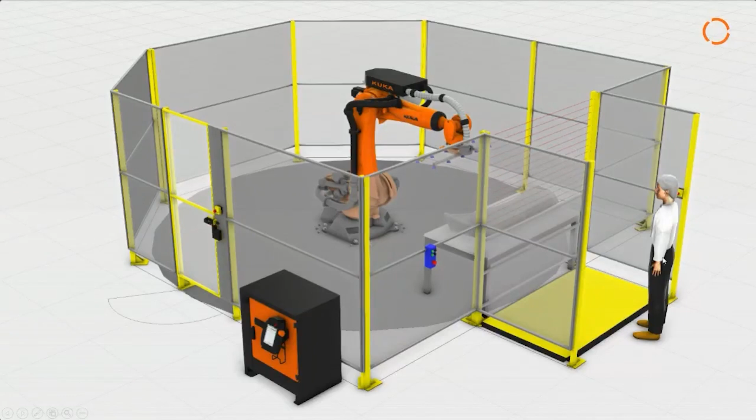Now, if we instead apply our simplest solution here, which is called safe single brake, that is actually a solution which I've tried to depict in this small picture here, where we have the robot mounted inside a closed cell. But instead we have a turntable here where the operator loads and unloads his goods. And what safe single brake does is actually to have a safe stop of this driven axis.

Okay, Laurie can't see everything I'm showing. Wonder if we have a bad bandwidth today. It says my signal is quite good, but hopefully I'll try to take it slow here and come back with questions, so we'll try to see it.

That means that at an emergency stop, it's the external axis that is stopped, not the robot itself. Now we can control several external axes on this part here. And it's also controllable through either a hardware interface, a wired interface, or a safety PLC interface. And likewise, we could also indicate the status of this functionality back to a safety PLC, for example.

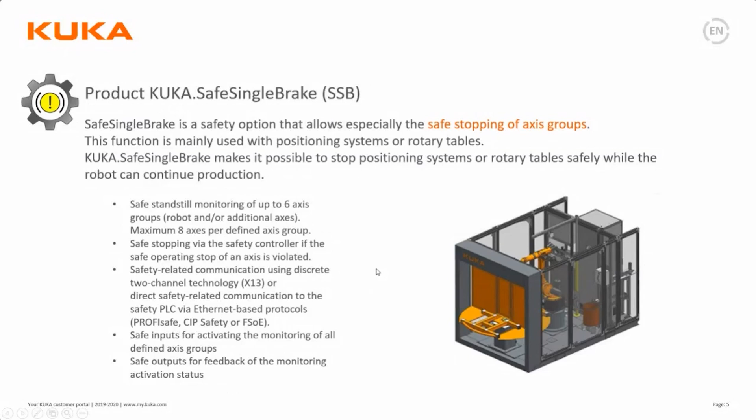The next level of safety solution we have here is what we have named safe range monitoring. And safe range monitoring is, to describe it, a software axis limitation. That means, for example, for the robot's 6 axes, we can limit how much they're able to move axis by axis. So you could say it's virtual physical axis pins to block how much each axis is able to rotate. That means that we are controlling the axes one by one and not really the tool center point of the robot in this solution.

However, this solution also comes with the functionality which is called braking before restricted areas, and I'll come back to what that is a little bit later on in this presentation. But as with safe single brake, this can be controlled by a safety PLC or hardware interface, and will also signal its status back to a safety PLC, for example.

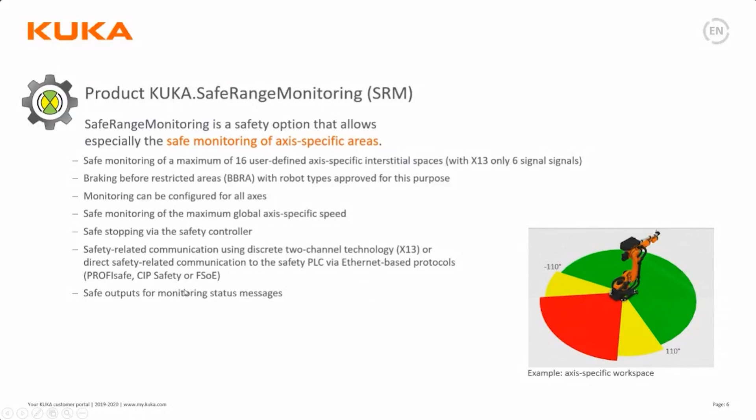The third and most complete product from our side is safe operation. And with safe operation, we can, for one thing, define a virtual robot cell which is significantly smaller than the reach of the robot, and the robot will not move outside of this box or limitation, thereby minimizing the footprint for a robot installation without actually hitting the fence, for example.

The second part of this is that we can define up to 16 user-defined monitoring areas within this space, which can be turned on and off depending on external signals, which stops the robot from entering these areas. And we also have this functionality of braking before range limits. And in this solution, we can also define the size of the tool and the workpiece by defining a number of spheres that cover the tool itself. So it's not only the robot, but also the tool and the load, which is hindered from getting into these areas.

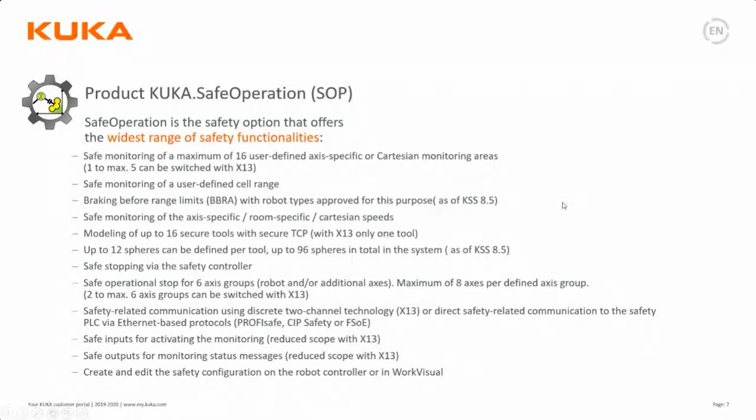So here we can see the difference: if we have put the robot into a cell and we are only using the axis monitoring, the safe range monitoring, then we only control axis by axis, and we have to stop the axis from hitting the fence in this way. But with safe operation, we can move this fence in closer to the robot, still without risking that the robot hits the fence, thereby freeing up valuable space in our production area.

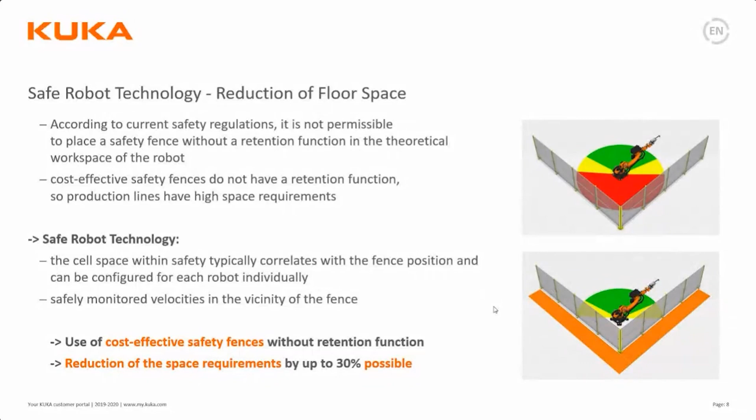And this is also what we've described in this little picture here. We actually defined a pretty tight, small working space allowed for the robot. In this little example picture, it's a very compressed working area allowed for this robot. But we could also define monitoring areas or boxes within this space, which the robot is then not allowed to go into.

And this could be used for different use cases. It could be the simple fact that there's a piece of machinery standing inside the cell which I don't want the robot to hit under any circumstances. It also could be an area or a volume which is turned on and off, for example, through a light curtain. And that in turn is an area where an operator loads or unloads some equipment.

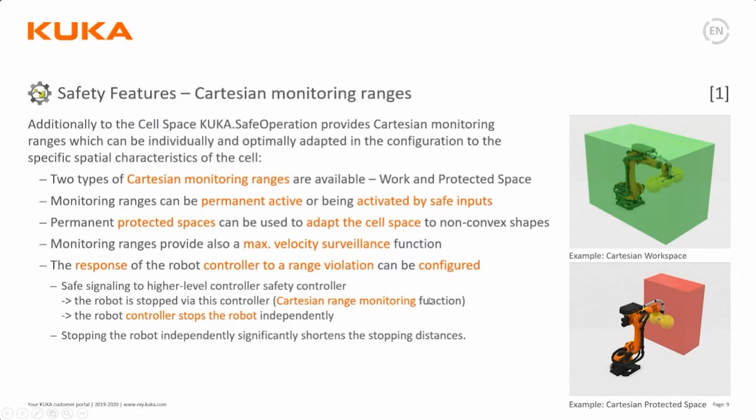And as I said, we could define up to 16 of these areas per robot, and they can be turned or tilted in any direction as we like, and they could even be coupled to the robot base position if we have a 7th axis to the robot, so that these boxes would then move together with the robot as it moves along its 7th axis.

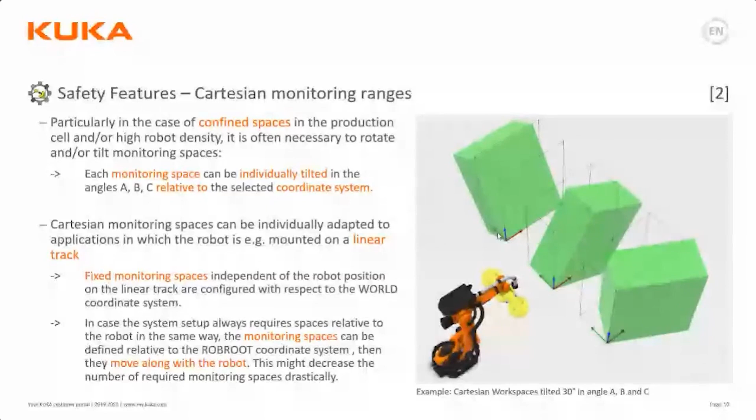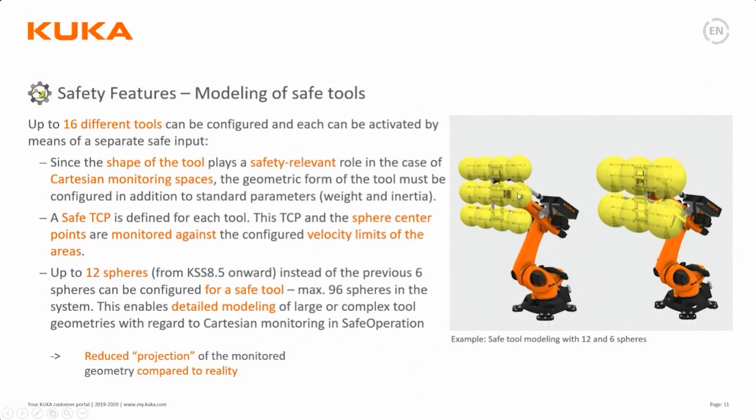In safe operation, we could also define spheres on our tool. I mentioned this earlier. That means basically that for each tool I have, I can define up to 12 of these spheres, which are meant to cover the volume taken up by the tool and the load. And these spheres are then taken into the calculation of the movement of the robot, so not even the load or the tool enters these restricted areas.

And this picture basically just shows that one of the differences with our KSS 8.5 and onward is that we can now define 12 of these spheres per tool, compared to 6 spheres in the old versions, which gives us a higher resolution, so to speak, for the tool and the workpiece.

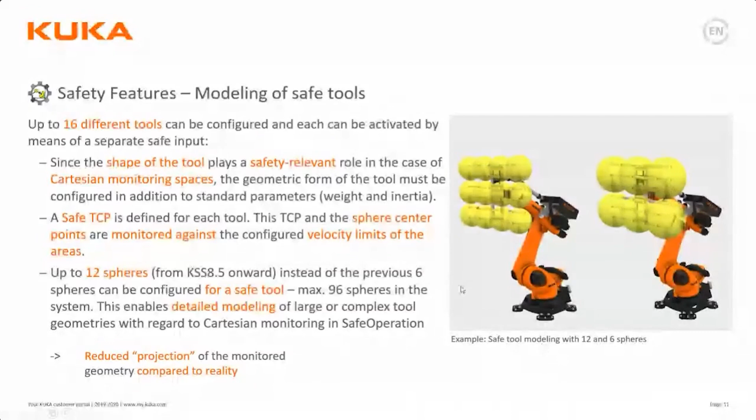So I'll let Andreas show you how this could look in terms of definition. So I'll just let the... All right, can you see my screen now? Yes? Yes. Yeah, good. All right.

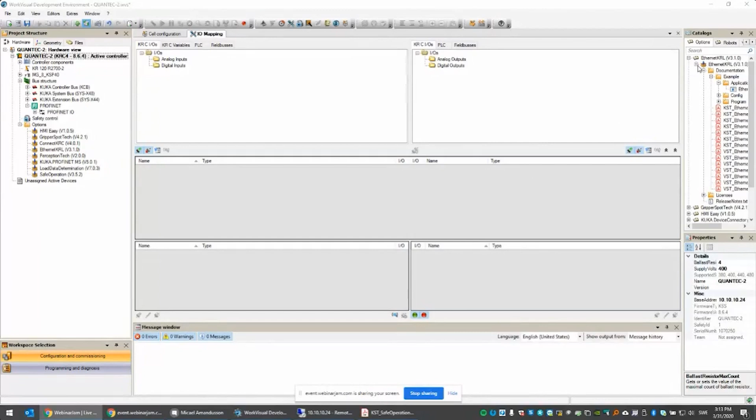There's 2 ways of configuring safe operation. Either you do it directly in WorkVisual, or you can do it on the smartPAD itself. I usually prefer the WorkVisual way to do that. It gives you a little bit easier interface. So first of all, the option has to be loaded in your project. It's here. And then under safety control, you have all the functionality. So by default, if you don't have the safe operation options, only the common tab is here. Now we have several more tabs.

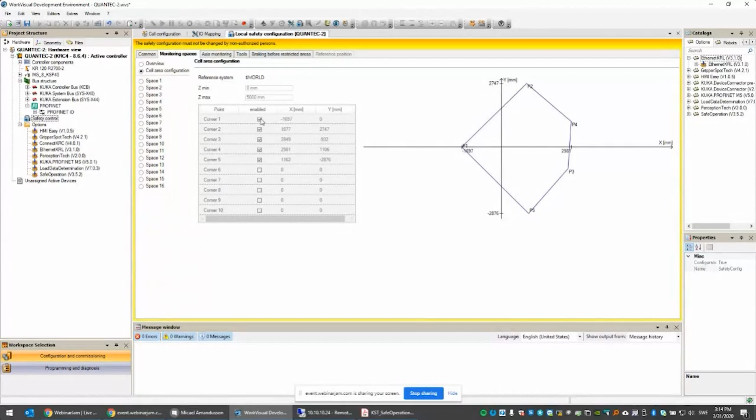And the first one is the monitoring space. And you want to start by defining the cell area. It's defined by setting up corner positions. You can have up to 10 corners, and you give them an X and a Y value referencing the center of the robot. And then you put in a Z min, which is basically the floor. And then you have the Z max, which is the roof or the top.

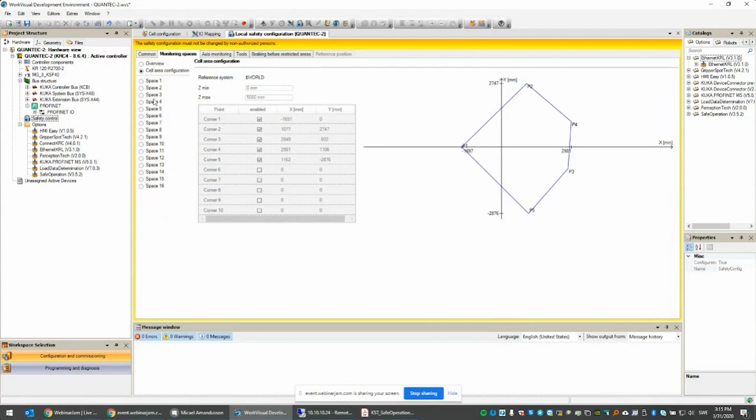When you're done with that, that's your outer area. The robot will never go outside that area. And you can't turn it on and off. It's always there. Then we have spaces. And we've got a total of 16 configurable spaces. And you can give them names. Okay, now I can actually configure them. So you can give them a name, and you have to select what type of space it is.

You have either Cartesian space, or you can have an axis-specific space. So do you want to limit the area in a Cartesian way, or do you want to limit each and every axis? The safe operation allows the Cartesian space. The safe range monitoring only allows the axis-specific space. So let's do the Cartesian. And is this a working space where you're allowed to work, or is it a protected space where you're not allowed to be?

And then we have an activation. You can choose if it's always off or always on, or by an input. And by input is usually a safety PLC or a hardwired connection, but it has to be redundant, so it's a safe input. And whether we want the robot to stop at the boundaries or not; usually we want to do that.

And we need to do a mastering test, to make sure that the tool and robot is where we think it is. You're using a 2-channel switch mounted somewhere in the cell, and then you have a fork-like object that you mount to your tool, and you have to enable both of those inputs at the same time. That's the mastering test, and you can choose here if you need that as a prerequisite to enter the zone or not. So let's enable that for safety.

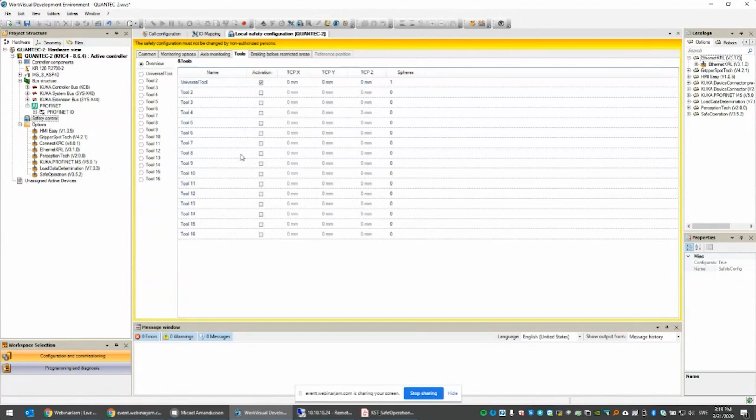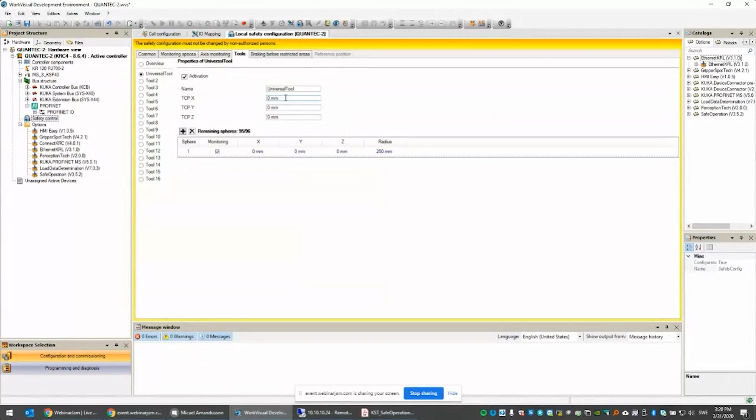This tab is how we describe or how we model our tools. So first of all, you activate the tool you want to use. You can have several tools, and then you can switch between them from the safety PLC. And you give them a name and a TCP. The TCP here is not the TCP that you use in your program. This is the safety TCP. This is where we monitor the velocity of the robot.

And then you can add your spheres. And every sphere, you can select if they're supposed to be monitored or not. And then the X, Y, Z in relation to the flange of the robot, and then the radius of the sphere.

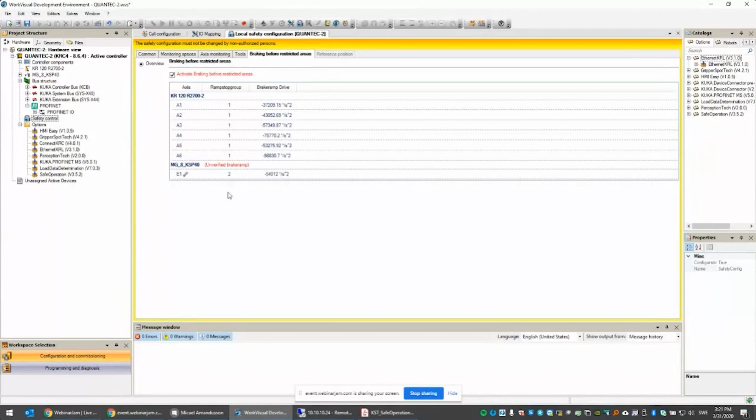All right. And then we have the braking before restricted area. We can enable that here. And this is working only for products with verified brake ramps. So our robots are, of course, verified. Our linear units are, but this is a servo gripper, not from KUKA, so it has an unverified brake ramp.

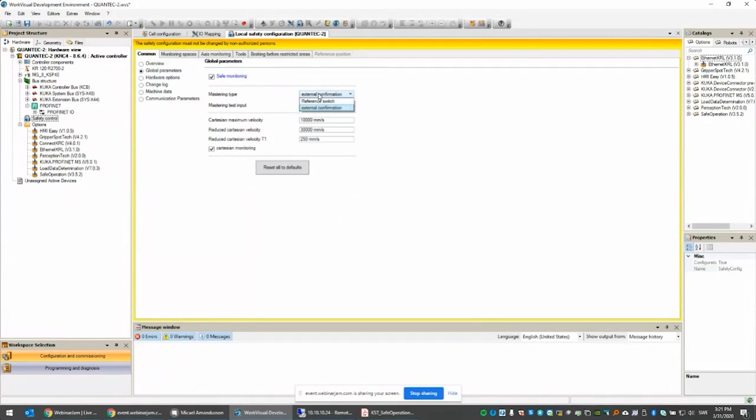And last but not least is the reference position. Right now, the reference position is coming from an external interface. So we can have the reference position coming in from a PLC. The PLC says it's good, and we don't really care about it. If we have the reference switch supplied by KUKA, it's connected directly to the robot controller, and then we select the reference switch here, and this enables us to teach our position here.

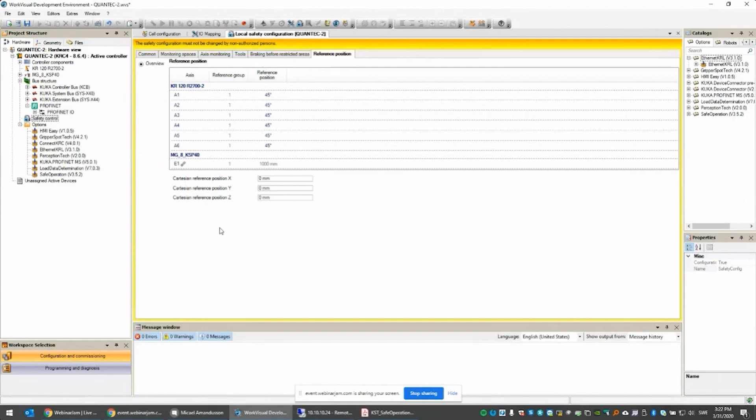So there's two ways of doing that. You can either type in the position for the reference switch. I usually prefer to actually jog the robot to the position and teach it. And that's what you can do on the Smartpad. So I'm going to switch over to the Smartpad and show you the configuration interface here. It's under configuration and safety configuration.

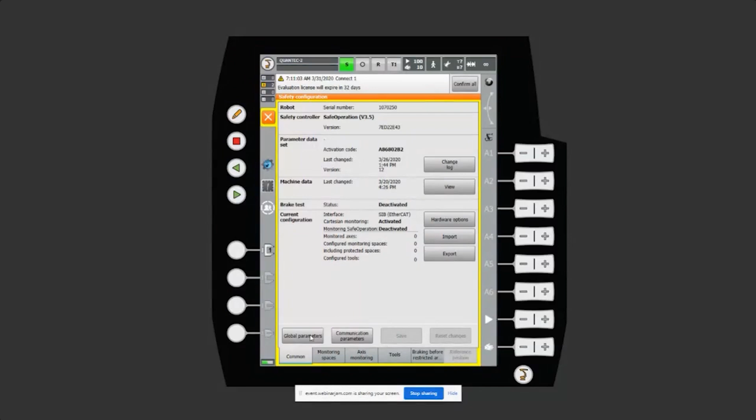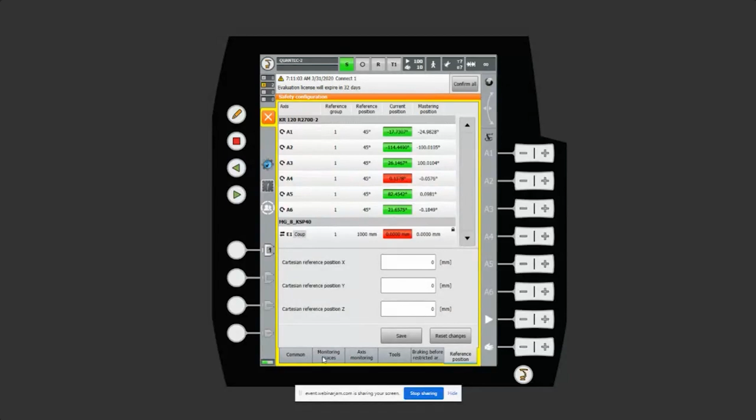We basically have the same tabs down here that we have on the robot in WorkVisual. I'm going to enable it and select the interface to reference switch. So the big difference here is that you can actually jog the robot to the position and then press save. It saves the current position as long as these aren't red. And they are only red when you're close to the zero position. So there's not much more to say about this. This is almost identical to what you can do in WorkVisual.

All right, we got a question. Are there any possibilities to define the safety zone and tool coordinates by CAD data? Typically, it's very difficult to give a clear overview of the defined spheres and zone by only the Cartesian coordinates. I would say you can use the CAD data as a base, but you still have to type in the numbers in our configuration tool.

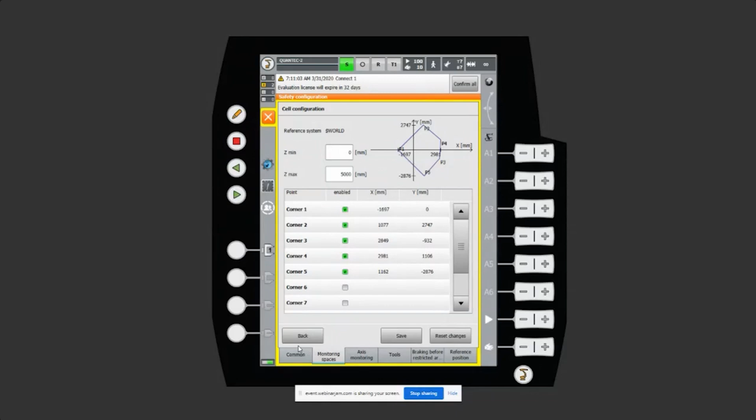Do we have any other questions? All right, I'll leave you back to Micael again.

So the last slide regarding our product is this table where we see the difference between the three different software products. And as we see here, SafeOperation basically handles all the options which are covered by the lesser products. For example, 16 safe tools with safe TCPs, which Andreas mentioned. We can monitor the velocities of the axes within the confined spaces and limit them if we like as well.

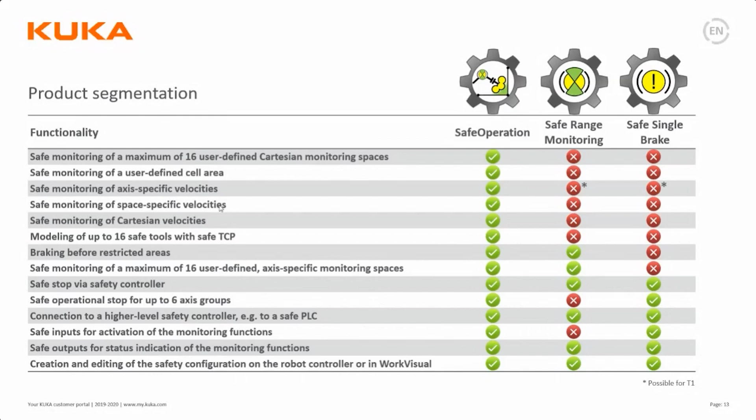Now, we talked a little bit about braking before restricted areas, and a few words on what that is. If we need to stop the robot during a movement along a path which follows this curve here, if we just hit the mechanical brakes, the robot will obviously continue a little bit along its movement direction, and where we come to a complete stop is a little bit unknown. So what braking before restricted areas actually does is that it knows where the robot is currently, and it knows the planned path and velocity, so it can predict where it will end up within the next few time frames.

By using this, if it comes very close to a fence or a restricted area, for example, it can actually limit the speed a little bit, so it at each time has the possibility to stop the movement before it enters the restricted area. Now we can do this as this example does, where we just stop the robot, and we are leaving the path, but we are not entering the restricted area.

But we could also define this as a path stop. That means that we still have the same path. We could end up inside a restricted area, but using this function, it will limit the speed, and at a safe stop one, decelerate to a complete stop along its path. That means that we have a much shorter time restarting again because the robot is still on its movement path. So that is a functionality that's found within SafeOperation and SafeRangeMonitoring.

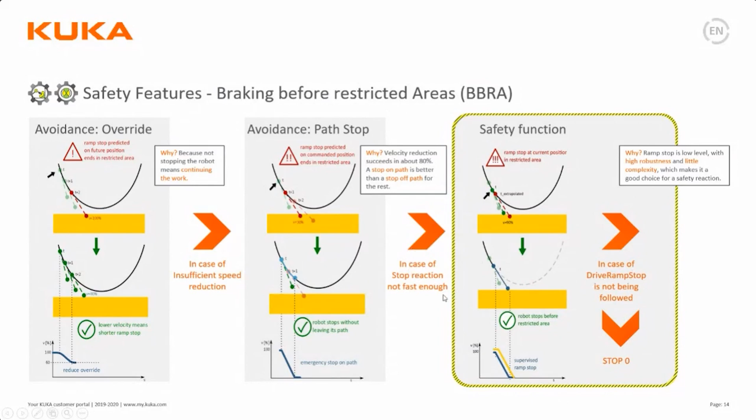And finally, if the load is so heavy or the speed is so high that it's really impossible to keep it on its path, it will try to stop the movement to ensure that it's always stopped before it enters the restricted area. Any questions on this? Because that pretty much concludes what Andreas and I wanted to show you today.